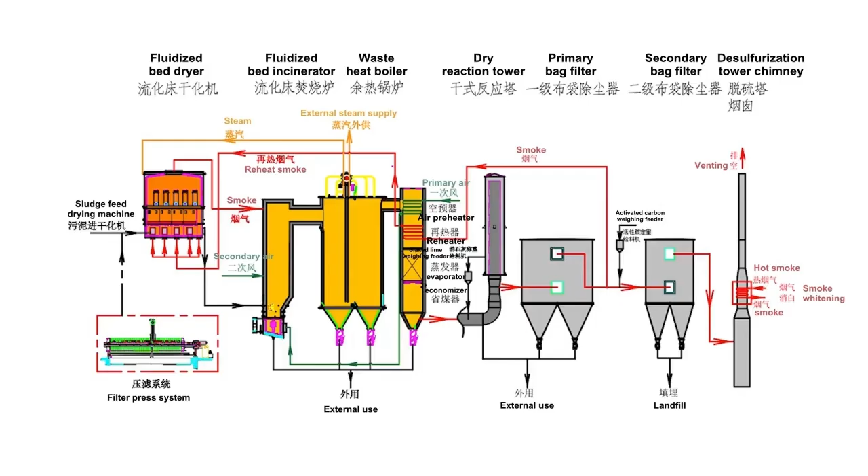Zhongding Environment, a one-stop solution provider for sludge resource utilization. The main sludge treatment process route adopts a process of drying, incineration, and flue gas treatment. The entire system process.

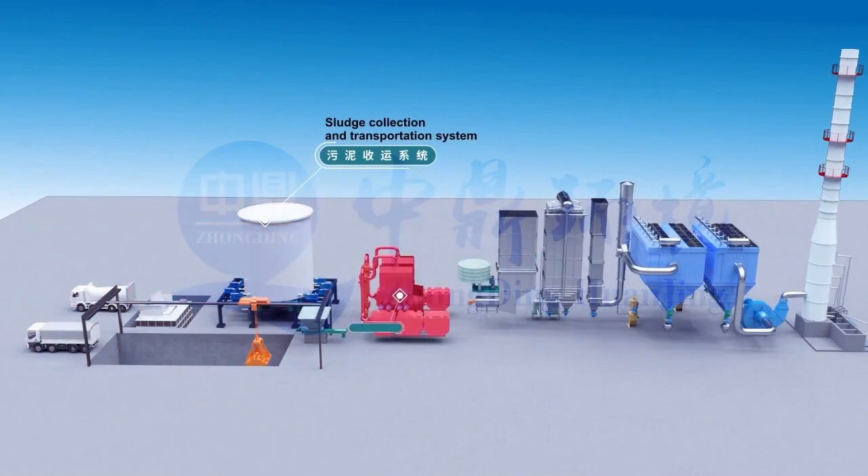Process system, including sludge collection and transportation system, sludge drying system, sludge incineration system, waste heat utilization system, flue gas purification system and more.

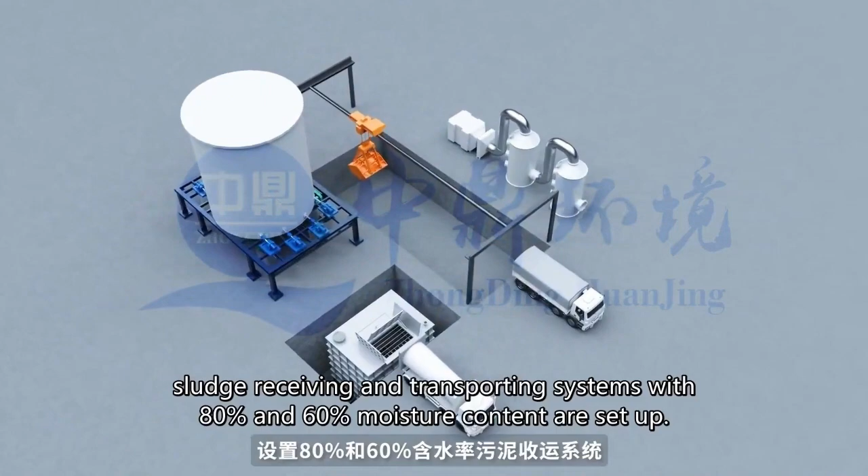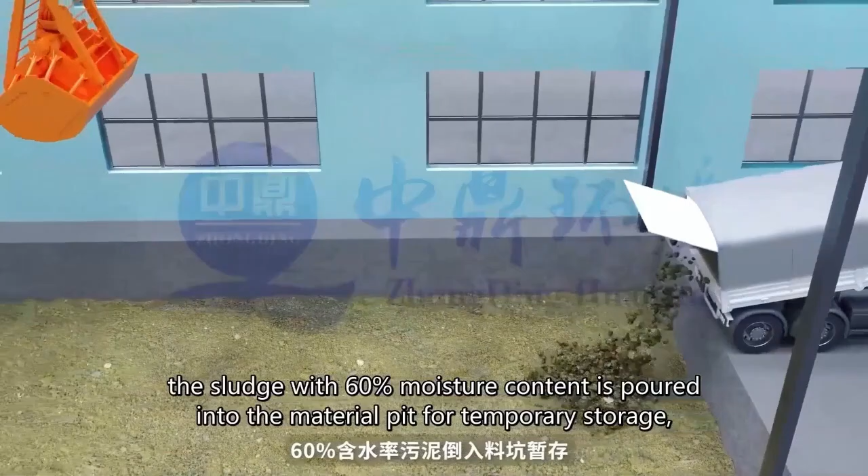An enclosed sludge receiving workshop is set up inside the factory area. Depending on the moisture content of the incoming materials, install sludge collection systems for both 80% and 60% moisture content, with the workshop equipped with a deodorizing system. When unloading, store 60% moisture content sludge in the material pit temporarily. Use equipment like grab bucket, sludge receiving hopper, scraper conveyor, etc. to transport sludge to the drying system.

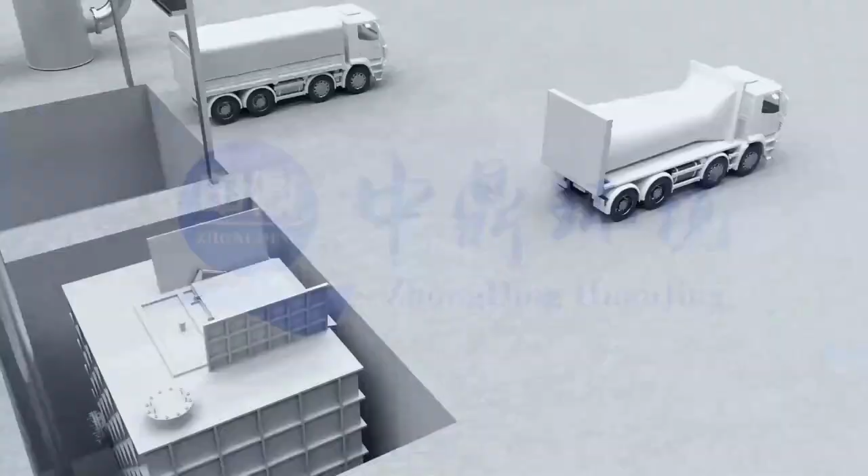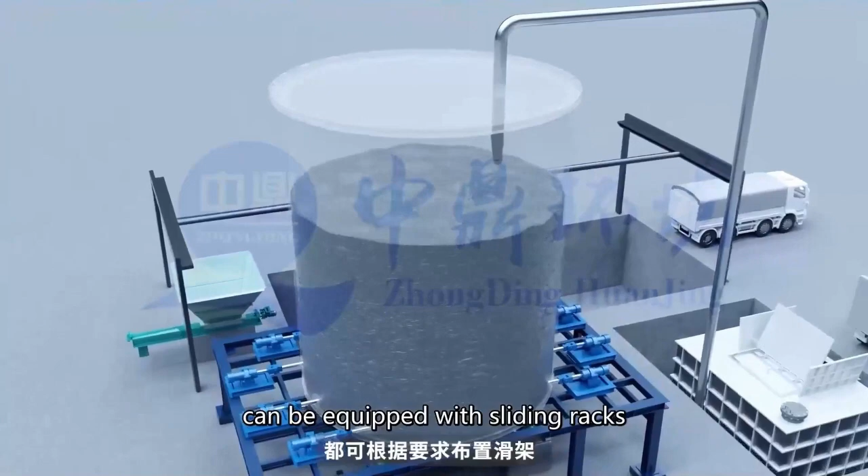Sludge with 60% moisture content requires a buffer silo with skids to ensure uniform feeding. 80% moisture content sludge is first pumped to wet sludge storage after the wet sludge receiving silo for temporary storage. Skids can be arranged in both the sludge receiving silo and sludge storage silo as required, ensuring smooth flow of sludge and preventing it from bridging. It is then pumped to the drying system. According to specific requirements, wet sludge can also be transported from storage to the sludge dewatering system, then sent to the 60% moisture content collection area after mechanical dewatering.

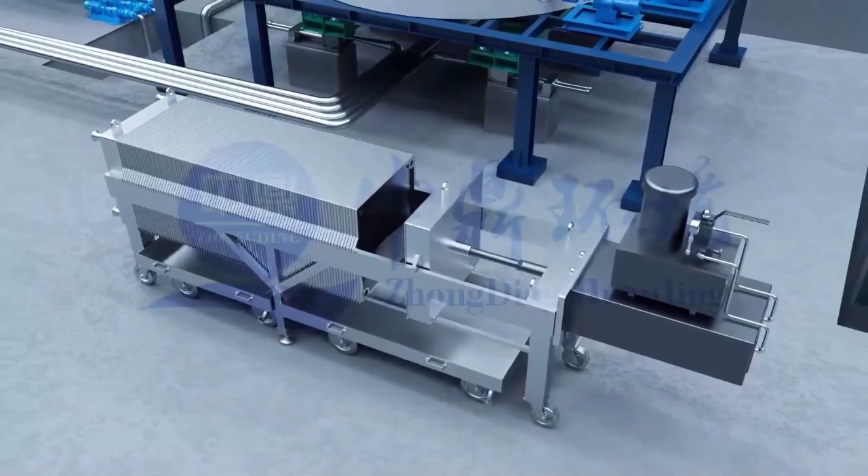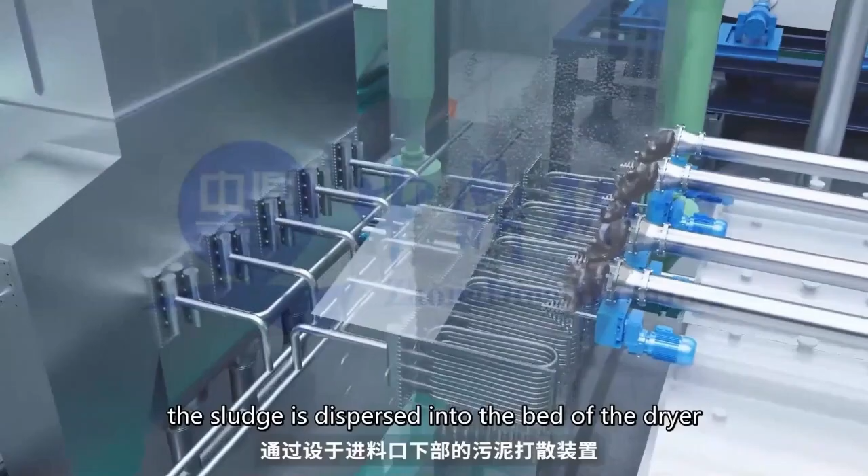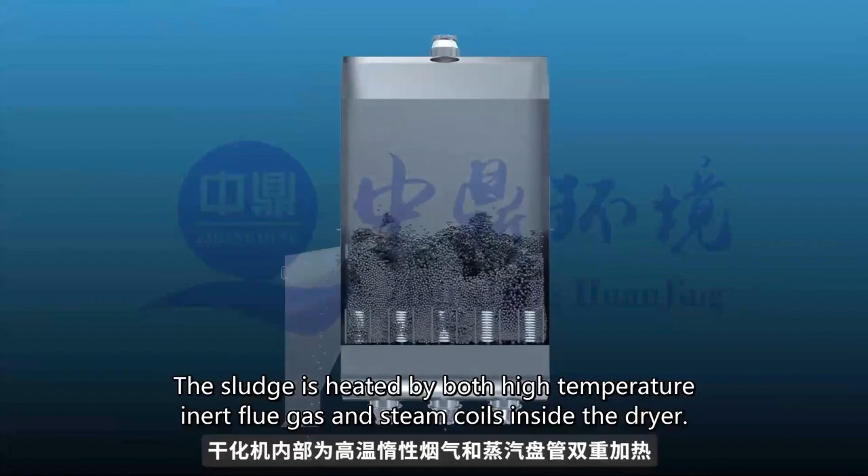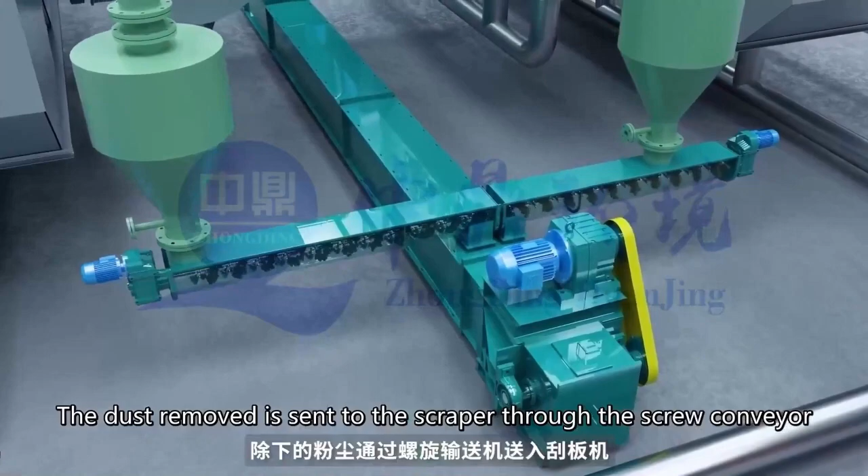Drying system process flow. After the sludge enters the drying machine, the sludge dispersing device at the lower part of the inlet disperses the sludge into the bed layer of the drying machine. Inside the drying machine, the sludge is heated by high-temperature inert flue gas and steam coils. The sludge undergoes heat exchange with flue gas by convection, and after thorough grinding heat exchange with the bed material, it dries to the appropriate moisture content. The reheated flue gas is discharged from the top of the drying machine into the cyclone dust collector. The dust removed is sent to the scraper conveyor through a spiral conveyor, along with the dried sludge, and then sent to the incinerator for burning.

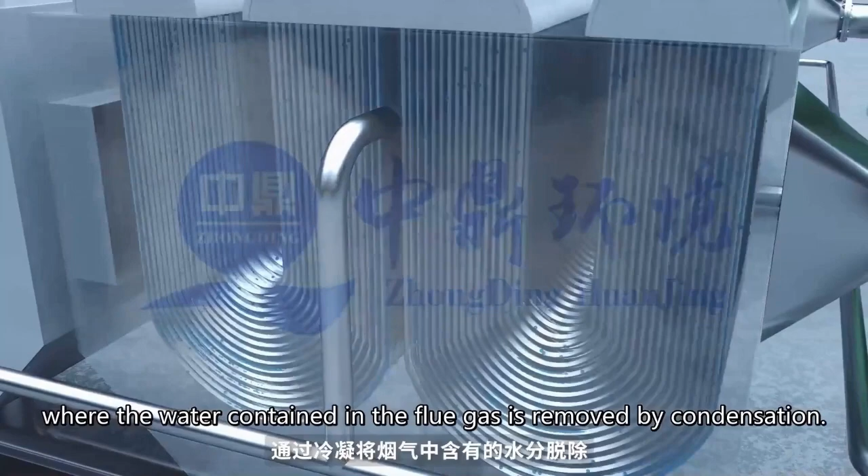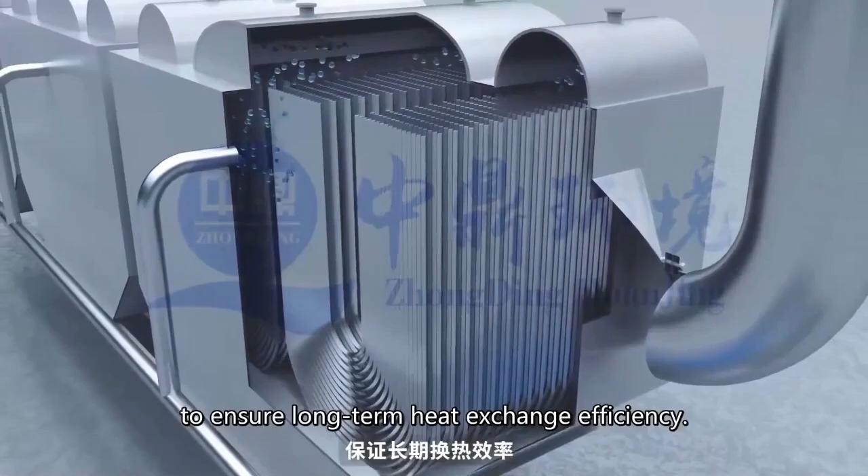The wet flue gas after dedusting enters the flue gas condenser. The moisture in the flue gas is removed through condensation. The wastewater flows from the bottom of the condenser into the sewage collection tank and is pumped to the sewage treatment system by the sewage pump. The upper clear liquid of the collection pool is used by the circulation pump to flush the heat exchange pipelines in the condenser, ensuring long-term heat exchange efficiency. The dried flue gas, after removing moisture, is sent back to the incinerator for reburning by the drying induced draft fan, effectively solving the problem of foul gas emissions.

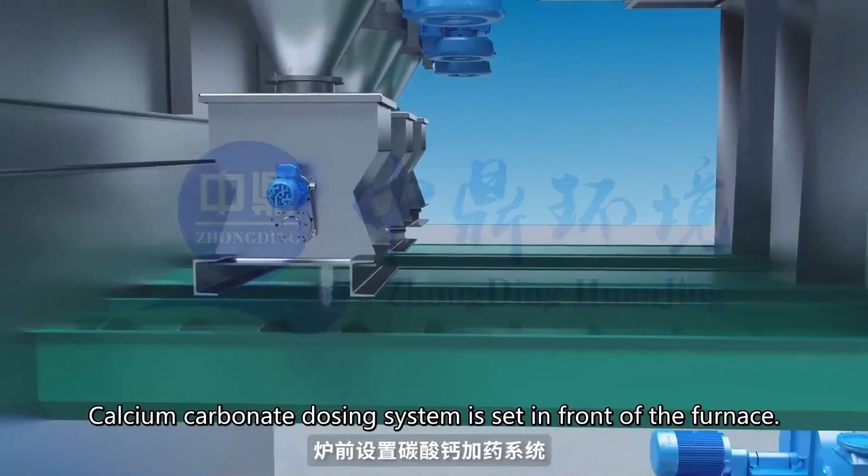After drying, the sludge flows out of the side of the fluidized bed, lifted by the screw conveyor and Z-shaped scraper to the furnace buffer compartment for dried sludge. A crushing device is placed in the high-level buffer space, effectively preventing the rehydration and agglomeration of dried sludge. After dispersion, the sludge is transported through the screw conveyor to the incinerator for incineration. A calcium carbonate dosing system is placed in front of the furnace. Calcium carbonate is fed into the furnace after being mixed with sludge by the feeder, achieving the desulfurization effect inside the furnace.

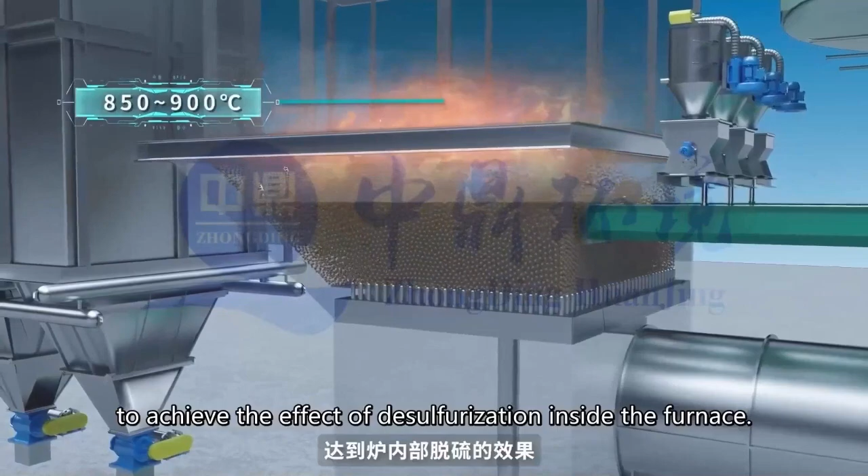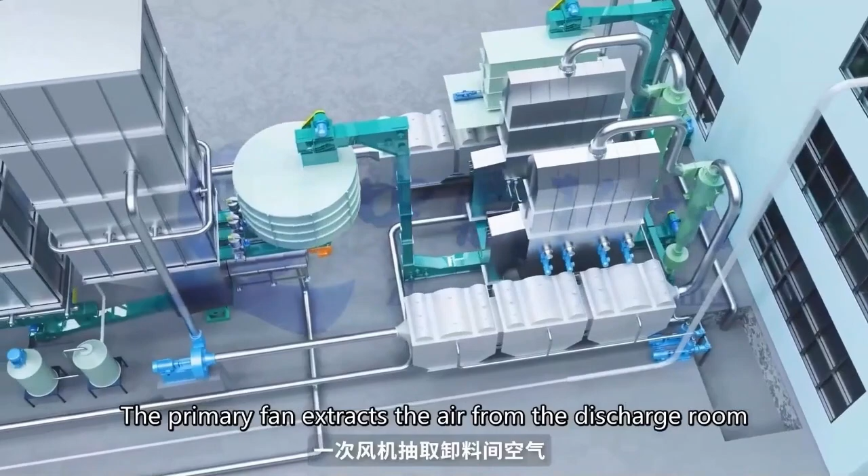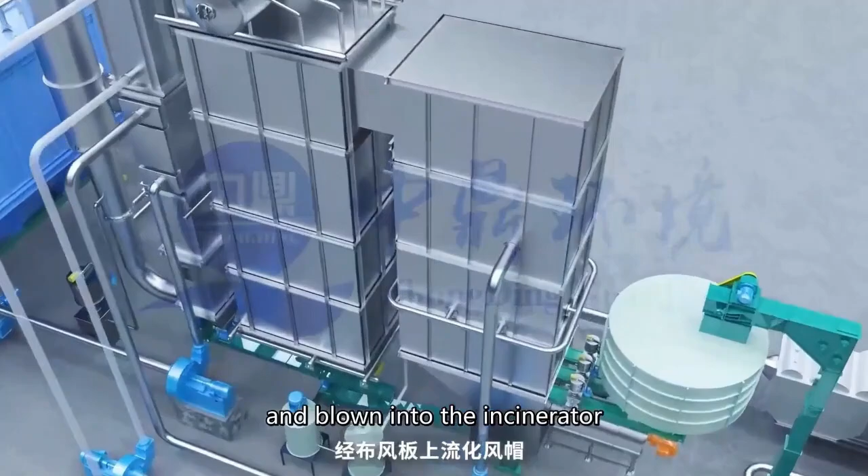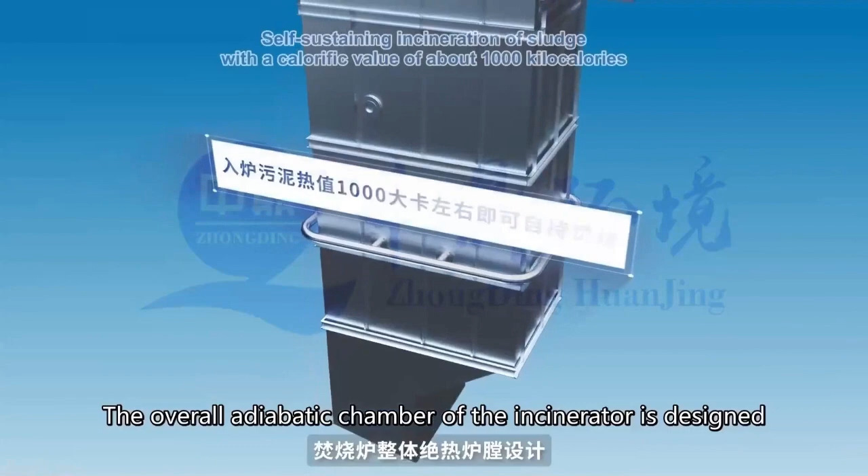Flow diagram of incinerator and boiler systems. The primary fan extracts air from the unloading space and sends it to the heat recovery system. The air preheater exchanges heat, warms it up, and then it is sent to the bottom sealing chamber of the incinerator. The fluidized air blown into the incinerator through the distribution plate causes the bed material to undergo fluidization. The secondary fan supplies air at the top of the bed material, ensuring thorough incineration of sludge. The insulated furnace design of the incinerator allows sludge with a calorific value of around 1000 kilocalories to sustain self-combustion.

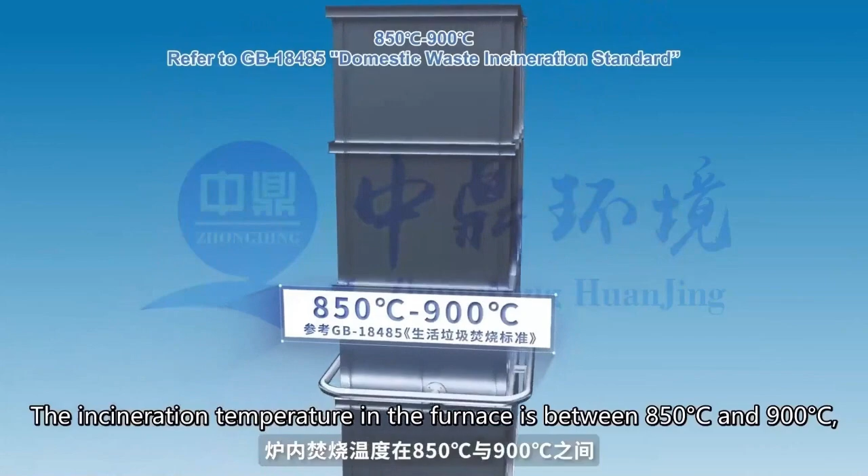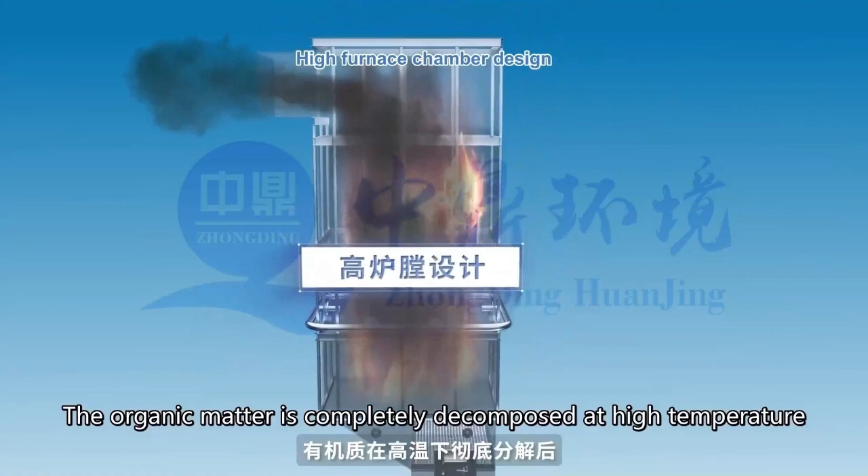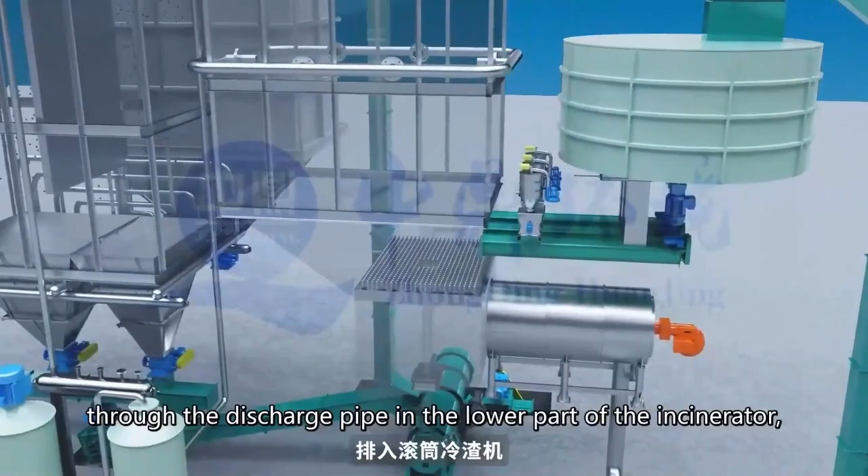The incineration temperature in the incinerator ranges from 850 to 900 degrees Celsius, meeting the national standard for municipal solid waste incineration. The high furnace design ensures that the flue gas remains for over 2 seconds, then discharges from the upper outlet after complete organic matter decomposition at high temperatures in the fluidized bed incinerator. An SNCR denitrification device is installed at the furnace outlet, using urea solution to eliminate nitrogen oxides from the flue gas. Slag is discharged into the drum slag cooler via the lower discharge pipe to cool it to below 100 degrees Celsius, then transferred to the storage bin for reuse in bed material, brick making, cement production, and other resource applications.

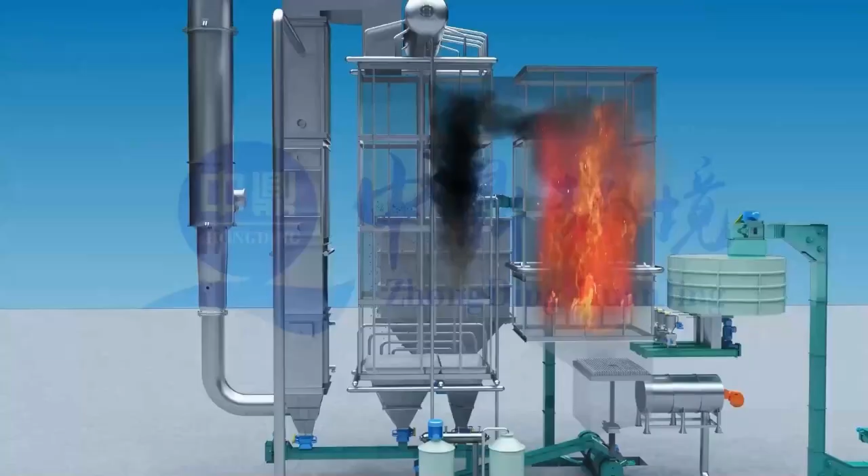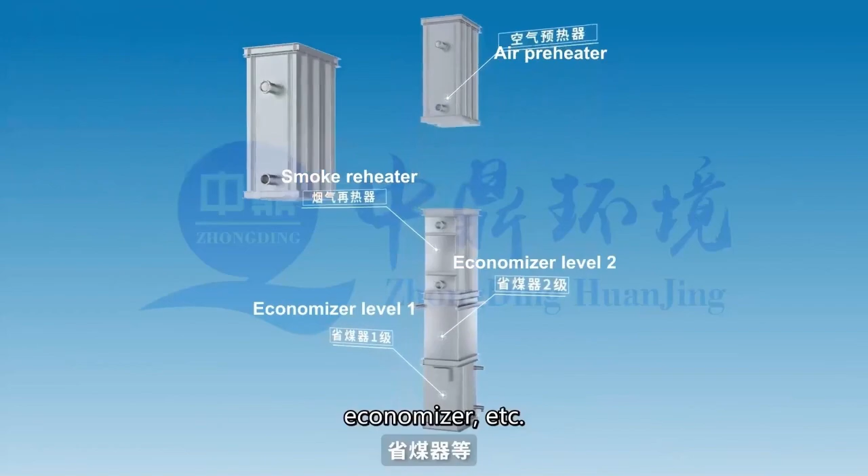The high-temperature flue gas enters the waste heat boiler to recover heat and generate steam. Some of the steam is used for steam-assisted drying in the front-end fluidized bed dryer, while the remaining steam can be used separately by the owner. The flue gas goes through the rear multi-stage heat exchange system of the waste heat boiler to completely recover heat, including air preheater, flue gas reheater, evaporator, economizer, etc. And a position for an SCR system can be reserved.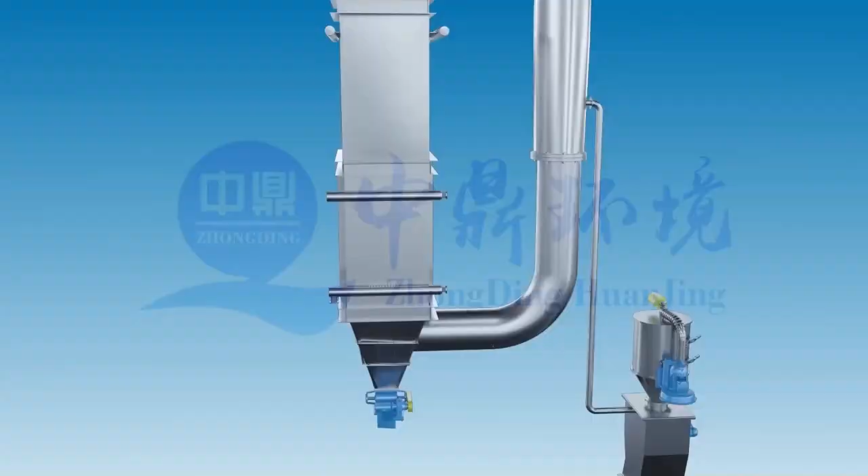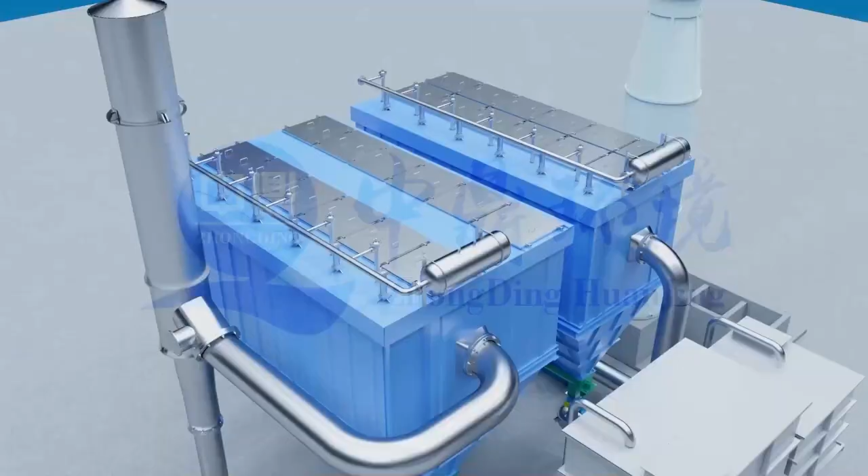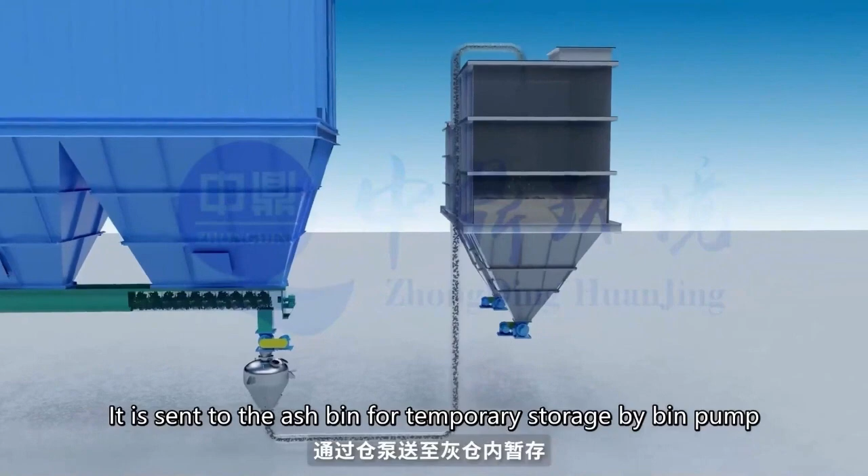Flue gas treatment system process. Finally, the flue gas at temperatures below 200 degrees Celsius is directed into the dry reaction tower, where lime powder is used to neutralize the acidic substances in it. The flue gas, laden with dust and having undergone desulfurization, is discharged from the dry reaction tower and enters the bag filter. The bag filter is divided into two stages. The initial stage of the bag filter eliminates 99% of suspended particles in the flue gas. The dust collected is commonly recognized as general solid waste, sent to the ash warehouse through the pump for temporary storage, and can be utilized in making bricks and cement.

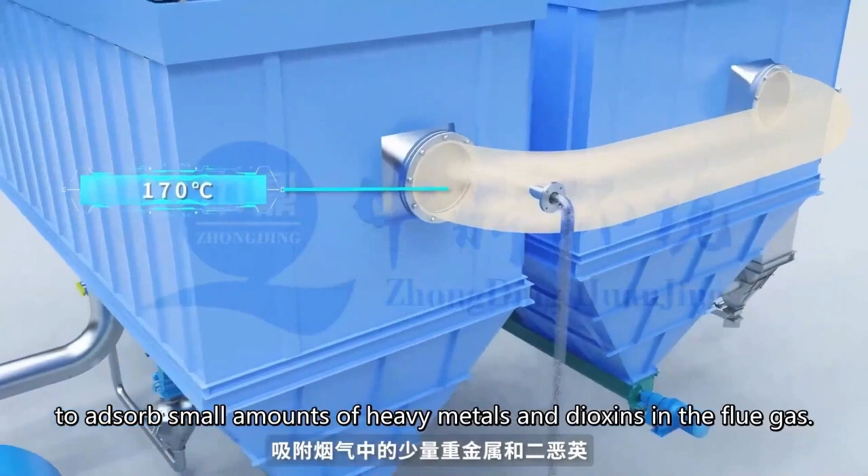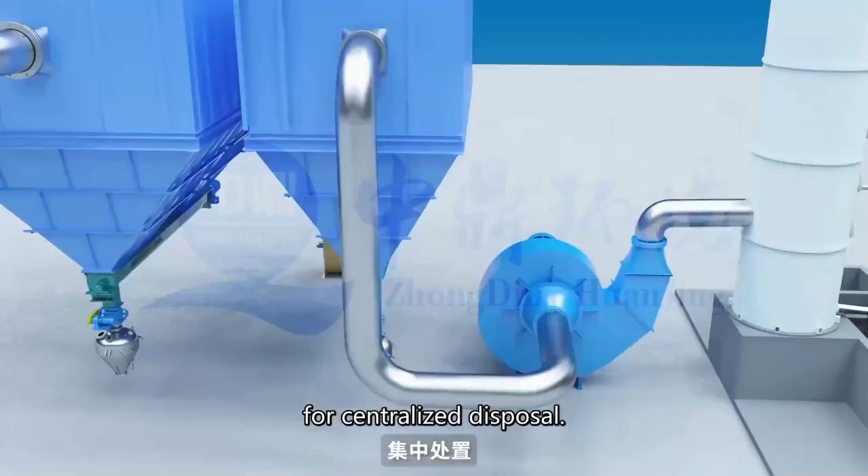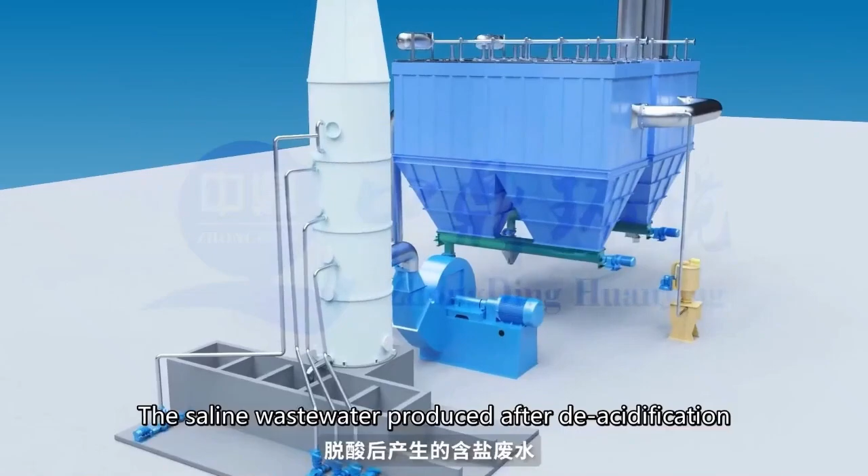At the entrance of the secondary bag filter, activated carbon is added to the flue to adsorb trace heavy metals and dioxins in the flue gas. The secondary bag filter aims to eliminate very small particles in the flue gas. This fly ash is generally identified as hazardous waste and sent to the hazardous waste ash warehouse for storage and treatment. The flue gas from the secondary bag filter is sent to the wet desulfurization tower by the induced draft fan, where the desulfurizer is continuously sprayed to achieve final desulfurization. The purified flue gas is emitted via an integrated chimney above the desulfurization tower, meeting ultra-clean emission standards. Salt-containing wastewater from desulfurization is pumped by sewage pumps to the sewage treatment system.

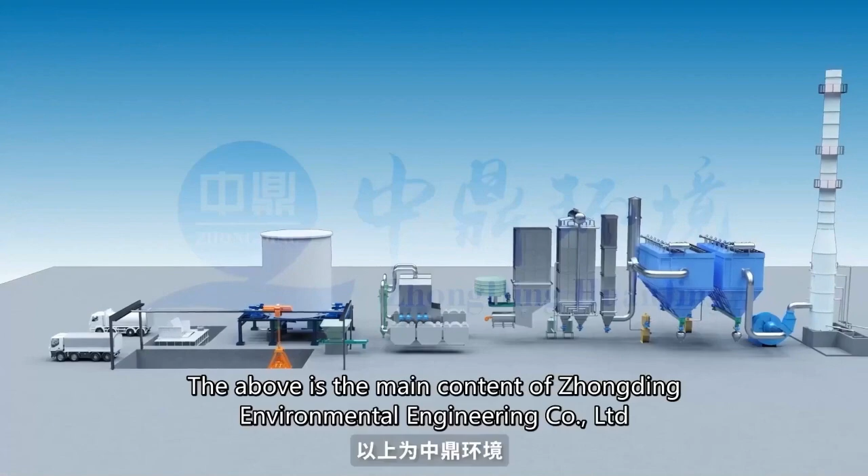Some of the flue gas is extracted from the duct before entering the secondary bag filter. The flue gas sent by the boosting fan is heated in the reheater of the waste heat utilization system, and then sent to the drying system as the fluidizing air for the dryer. Thus, a large circulation of drying flue gas is formed within this process system, fully utilizing the internal waste heat of the system to ensure high recovery and low energy consumption throughout the system. The above is the main content of Zhongding Environment's sludge drying and incineration technology.